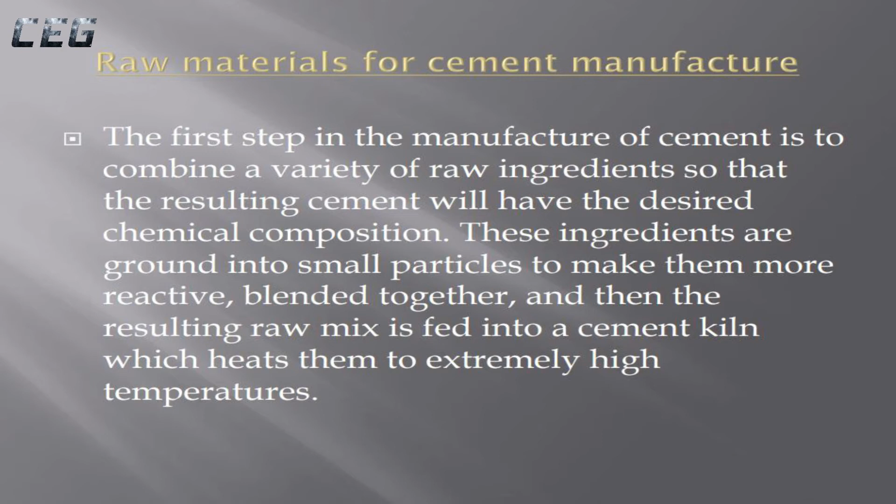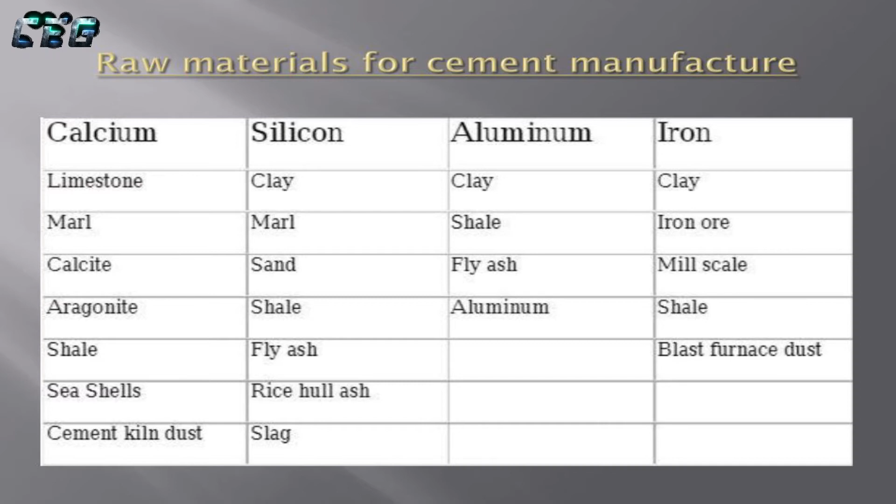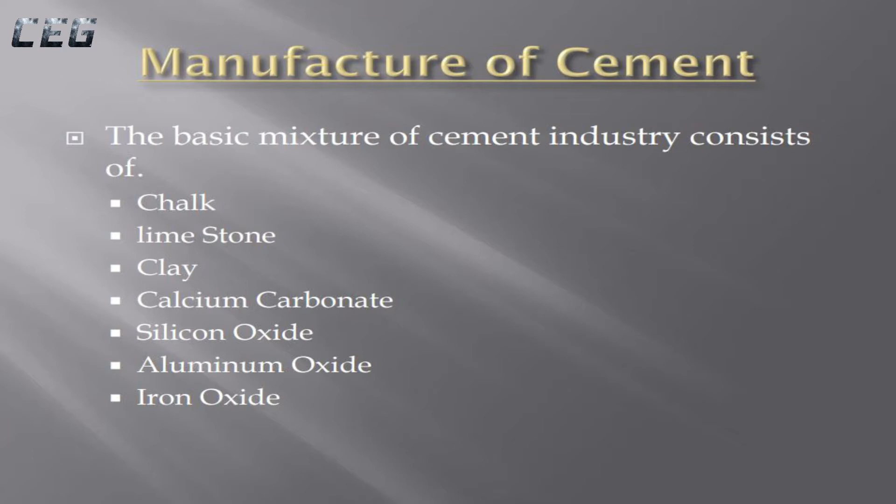Manufacture of cement. The basic mixture of cement industry consists of chalk, limestone, clay, calcium carbonate, silicon oxide, aluminum oxide, iron oxide.

Raw materials processing. Portland cement is by far the most common type of cement in general use around the world. This cement is made by heating limestone, calcium carbonate, with other materials, such as clay, to 1450 degrees Celsius in a kiln, in a process known as calcination, whereby a molecule of carbon dioxide is liberated from the calcium carbonate to form calcium oxide, or quicklime, which is then blended with the other materials that have been included in the mix, to form calcium silicates and other cementitious compounds.

The resulting hard substance, called clinker, is then ground with a small amount of gypsum into a powder to make ordinary Portland cement, the most commonly used type of cement, often referred to as OPC. Portland cement is a basic ingredient of concrete, mortar and most non-specialty grout. The most common use for Portland cement is in the production of concrete.

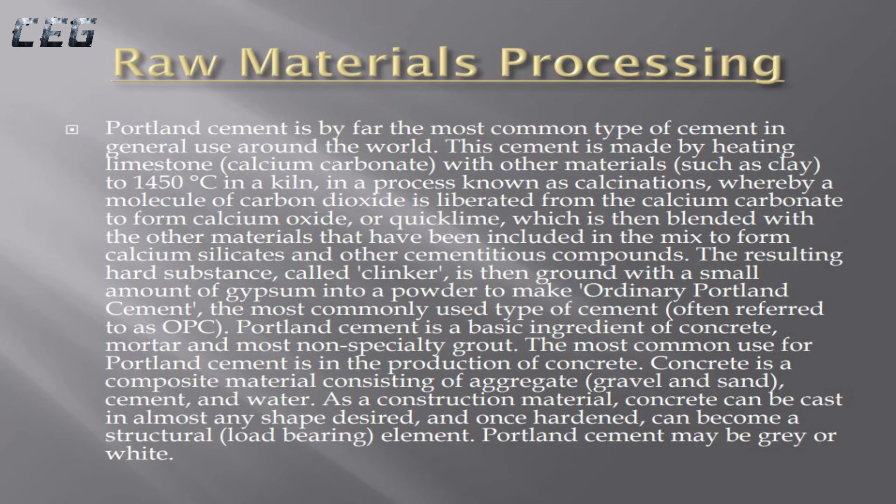Concrete is a composite material consisting of aggregate, gravel and sand, cement, and water. As a construction material, concrete can be cast in almost any shape desired, and once hardened, can become a structural, load-bearing element. Portland cement may be gray or white.

Cement manufacturing process. The quarry. Cement plants are usually located closely either to hotspots in the market or to areas with sufficient quantities of raw materials. The aim is to keep transportation costs low. Basic constituents for cement, limestone and clay, are taken from quarries in these areas.

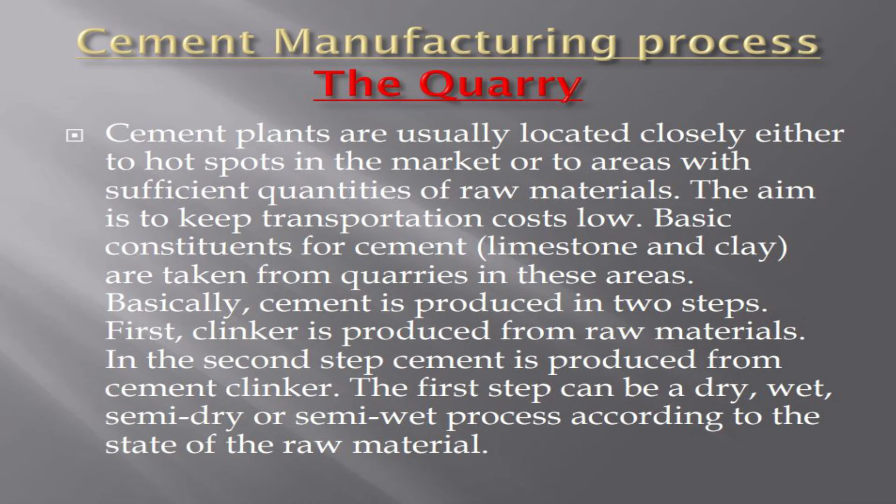Basically, cement is produced in two steps. First, clinker is produced from raw materials. In the second step, cement is produced from cement clinker. The first step can be a dry, wet, semi-dry or semi-wet process according to the state of the raw material.

Making clinker. The raw materials are delivered in bulk, crushed and homogenized into a mixture, which is fed into a rotary kiln. This is an enormous rotating pipe, 60 to 90 meters long and up to 6 meters in diameter. This huge kiln is heated by a 2000 degrees Celsius flame inside of it. The kiln is slightly inclined to allow the materials to slowly reach the other end, where it is quickly cooled to 100-200 degrees Celsius.

4 basic oxides, in the correct proportions, make cement clinker. Calcium oxide, 65%. Silicon oxide, 20%. Aluminum oxide, 10%, and iron oxide, 5%. These elements mixed homogeneously, called raw meal or slurry, will combine when heated by the flame at a temperature of approximately 1450 degrees Celsius. New compounds are formed, silicates, aluminates and ferrites of calcium.

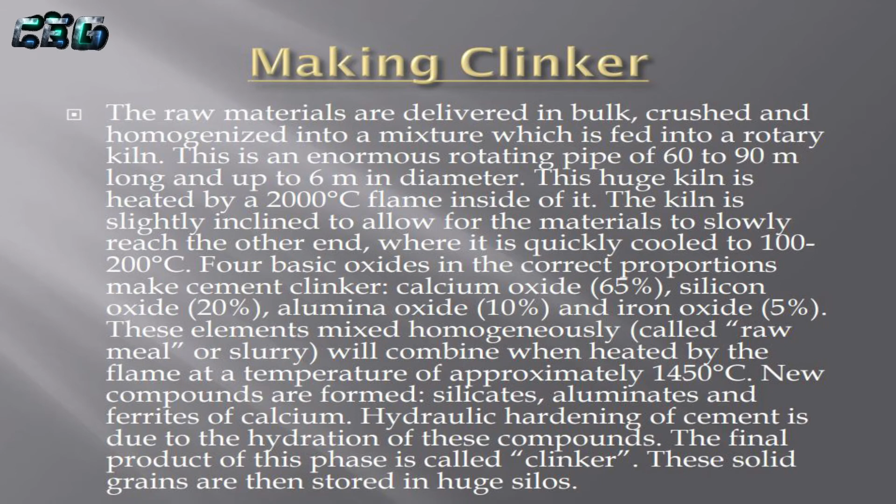Hydraulic hardening of cement is due to the hydration of these compounds. The final product of this phase is called clinker. These solid grains are then stored in huge silos. Process to make clinker. So to make clinker there are processes: wet process, dry process.

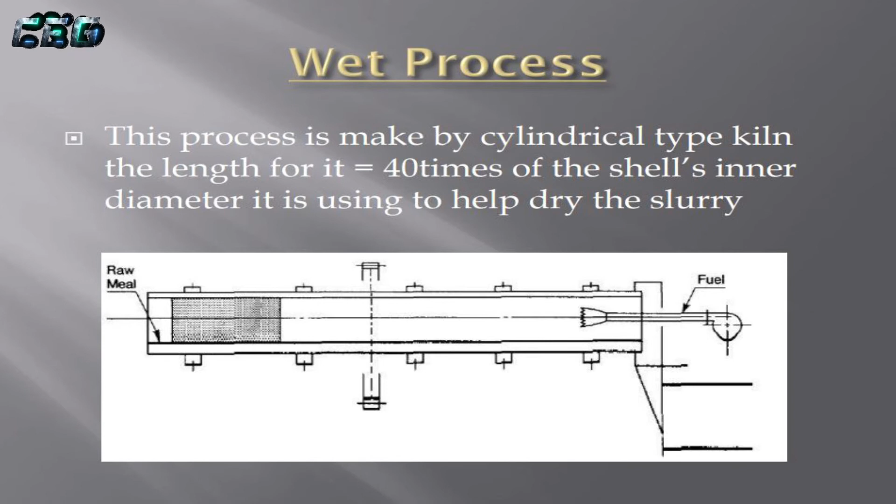Wet process. This process is made by a cylindrical type kiln. Its length is equal to 40 times the shell's inner diameter. It is used to help dry the slurry.

Dry process. The cement roasting machine is the device to heat and dry materials. The materials in the coaxial type roasting machine are roasted through retracing and raising between the helical lobe and the intermittent spiral plate. The sleeve structure of the machine can several-fold shorten the length of the dryer. Hereby the radiating surface and heat consumption are significantly reduced, while the increased heat exchange surface greatly enhances thermal efficiency.

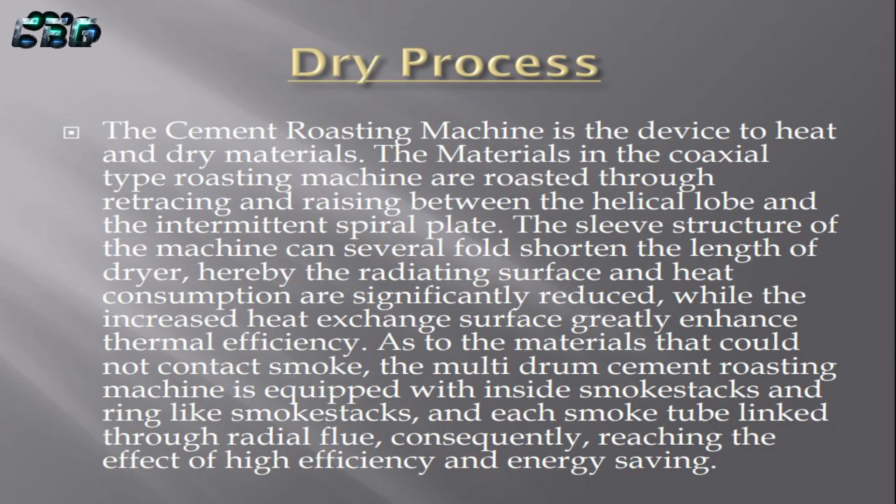As to the materials that could not contact smoke, the multi-drum cement roasting machine is equipped with inside smokestacks and ring-like smokestacks, and each smoke tube is linked through a radial flue, consequently reaching the effect of high efficiency and energy saving.

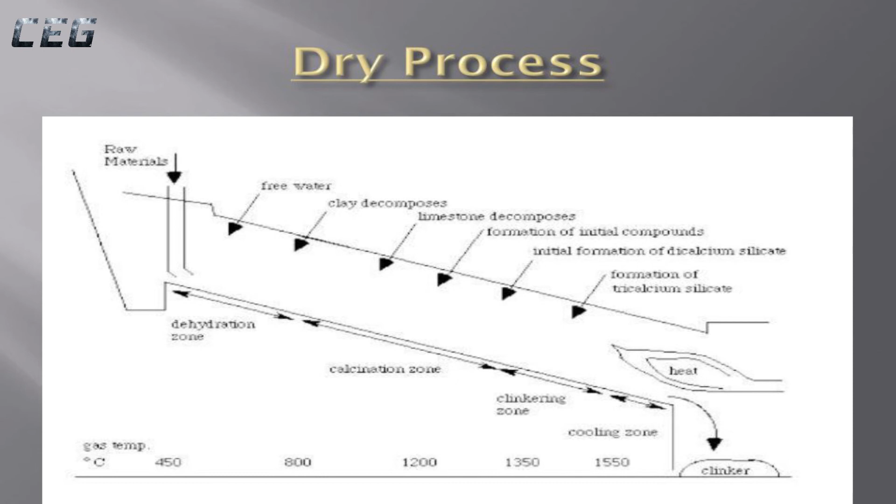Finish process. The second phase is handled in a cement grinding mill, which may be located in a different place to the clinker plant. Gypsum, calcium sulfates, and possibly additional cementitious materials, such as blast furnace slag, coal fly ash, natural pozzolanas, etc., or inert materials, limestone, are added to the clinker. All constituents are ground, leading to a fine and homogeneous powder. End of phase 2. The cement is then stored in silos before being dispatched either in bulk or bagged.